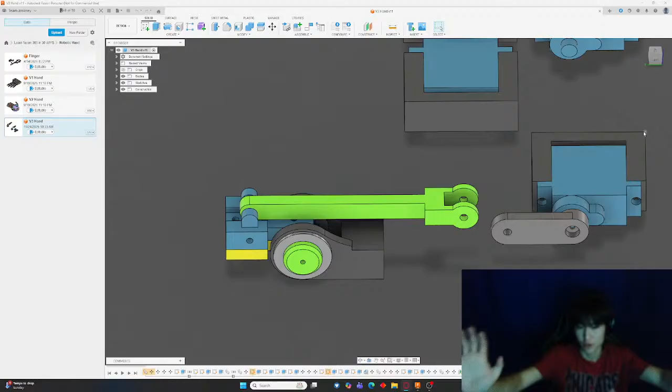So, this is session number 2 of our fusion modeling session. We're going to pick up where we left off last time with this little hinge joint right here with the servo, and I've already put this in place like that, right?

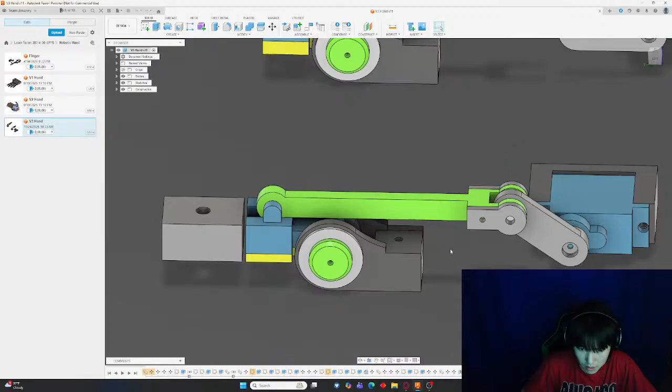What we want to do here is I've made up a quick sketch of a mechanism that I've been thinking of, just like this. So we're going to be modeling that, and hopefully all of the phalangeal joints. This is going to be quite a while, but I'm up for it. Literally, I'm up for it.

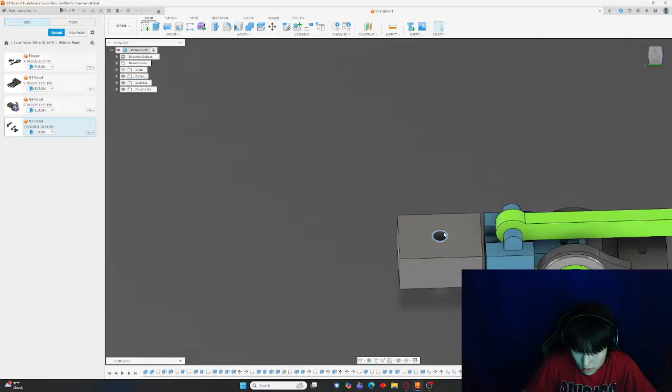So what I really want to do now is this latest edit that I did, this latest extrusion, I'm not really fond of it, so I'm going to get rid of it. Not this one, this one right here, where I extruded this, I'm going to get rid of this. I'm going to get rid of this as well. So this will be the proximal phalangeal joint.

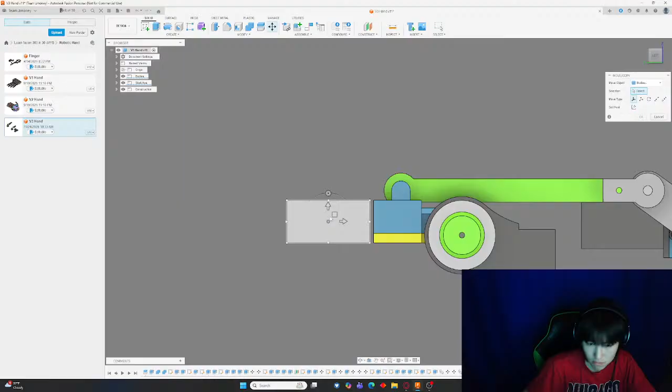This is kind of just the palm section. This is like the metacarpal, I guess. So usually you want the proximal phalange to be pretty long, and we want this to protrude a little bit upright. You want this to have a little curve, I guess. So we're kind of just going to have to freehand this, really. Just whatever works, I guess.

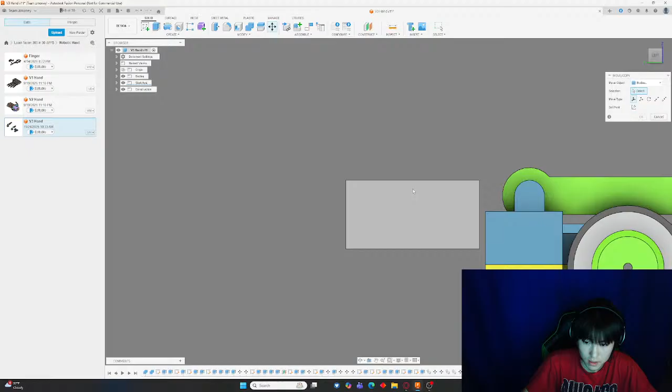Honestly, I think I'll keep it level for now. So I'm going to keep this level just for now, I guess. I should probably be moving it a little bit, so this way, right? So now that I have it this way,

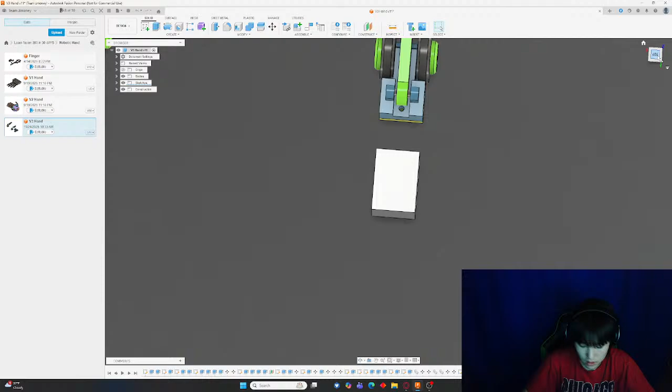I want to, let's see, let's take the diameter of this tubing here, 4 millimeters. So a 4 millimeter little thing.

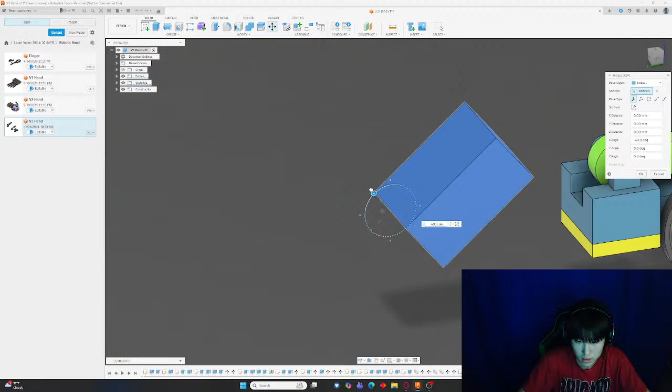So what I'll actually do is I'll construct the line like this, and then I want to move this, actually. That's not what I want to do. I should be doing this. I'm going to do this. I'm going to put it at a 45-degree angle, and I'm going to construct one right here. And now I'm going to move this back.

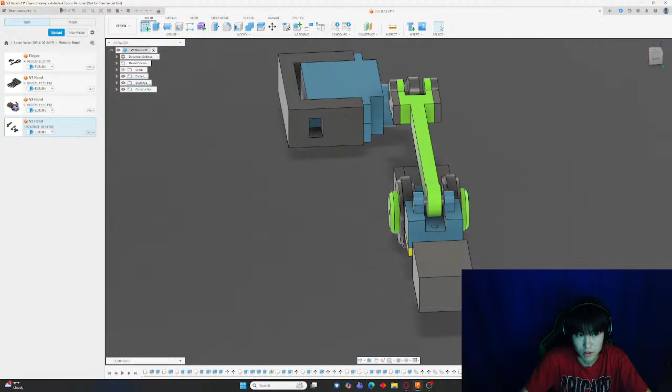Crap, I just realized that I can't really do that. So I'm actually not going to do that. What I want to do is create a body. Yes, that's what I'll do. I'll create a body like this, right?

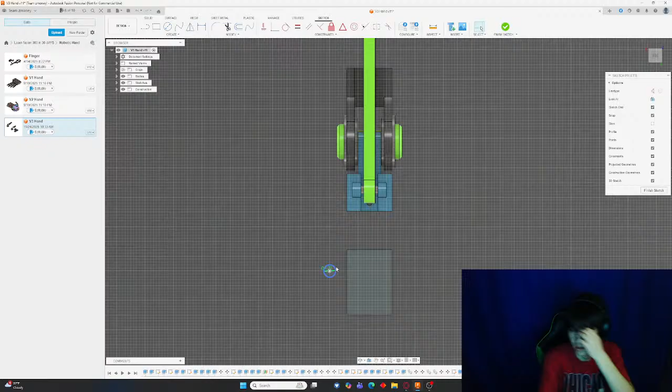0.42 - it's just got to be 4.2. 4.2 millimeters, because you want to think about the printer tolerance as well, right? I don't really know if 4.2 is going to make much of a difference, but usually when I make these kinds of models, I just do it all the way, but maybe it's different. So I'll just try it as an experiment.

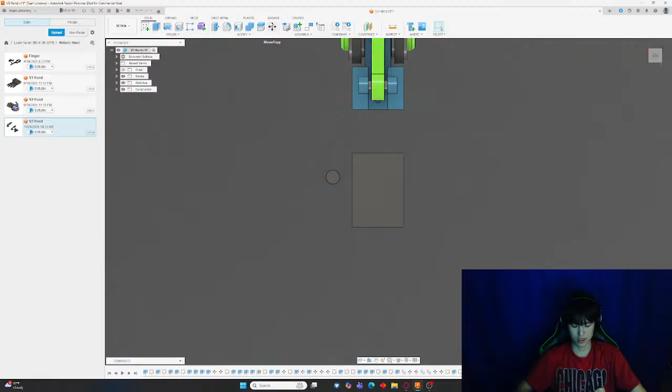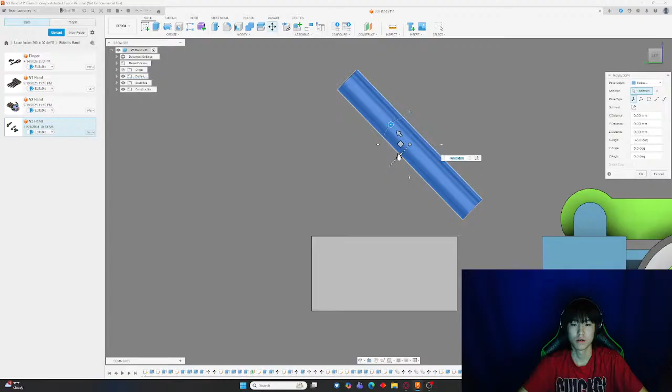So now I have this 4 millimeter tube, and since I have a 4 millimeter tube, what I'll do is I'll just put it like this. Make sure it's in the middle. It seems to be in the middle. And I'll go at it from here. I'm going to rotate it 45 degrees. And then I'll just move it like this. Bam, that seems pretty good.

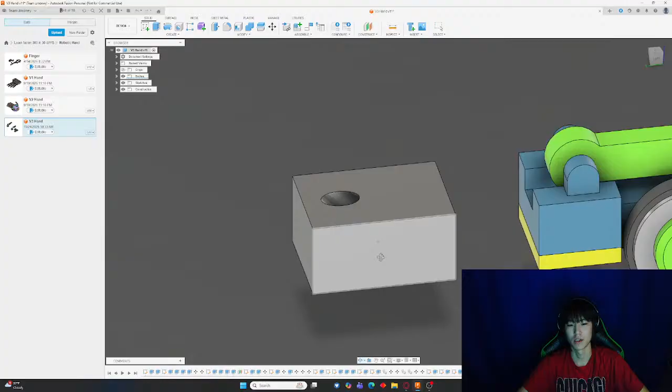And then I'm going to do - I'll do this. I'll just go through like that. Now we have a 45-degree angle hole in our CAD. So that's pretty good.

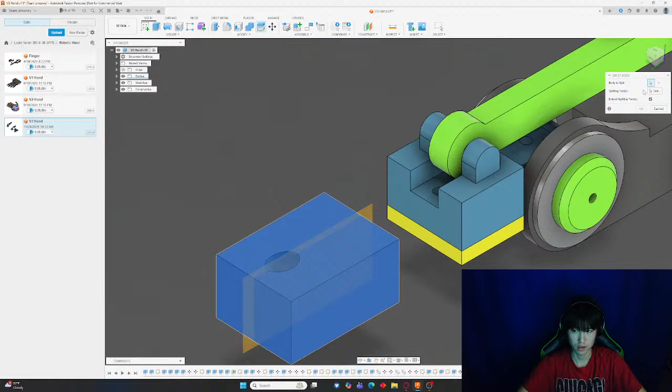Now how about we try splitting this in half? Let's do a construction plane, 8 millimeters, and we're going to split this body. So when we split it, we can see that it's good. And now we want to have a thing at the front. That's in the middle, so it's good.

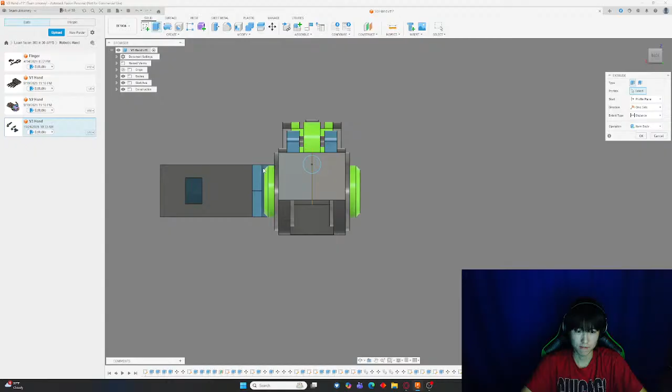How about a 4.2 right here? Let's do that. And then we want to just cut it into there. Let's just try to smooth this. Let's do it halfway, see if that's good. Oh my god.

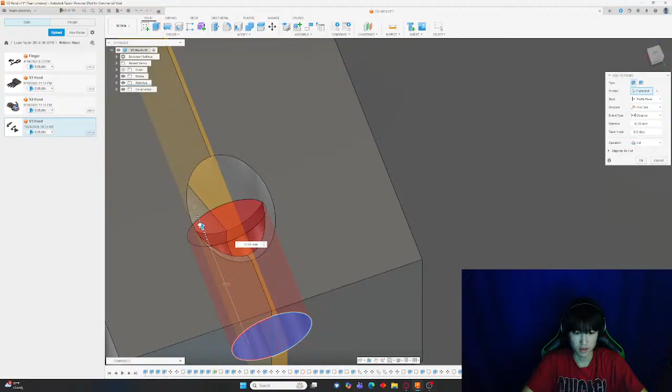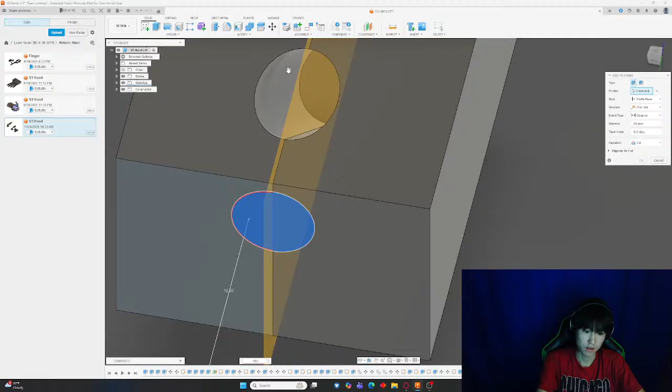Okay, maybe that was not good. Maybe just on the spot is good. That's kind of rough, I don't know if I like that. Let's try to get it up to, let's just do 10, right? -10. -10 cuts it all the way into it. Let's do 9. -9 and it makes this weird divot. I don't like that.

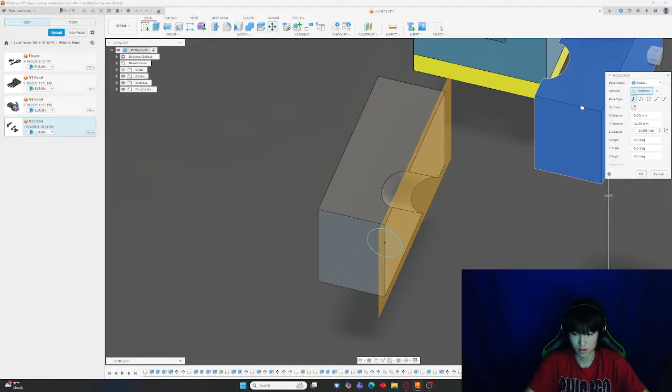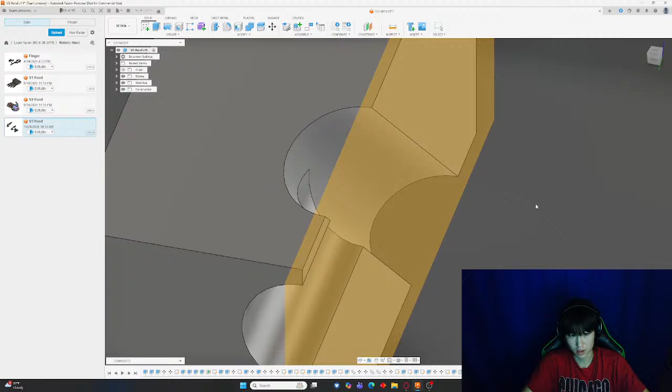So let's try moving this and then we'll try it. And so we can actually see a good side view. I see, so the magic spot really seems to be 8.6. And that makes it a nice spot like that without any weird divots or anything like that. So 8.6 is the magic number.

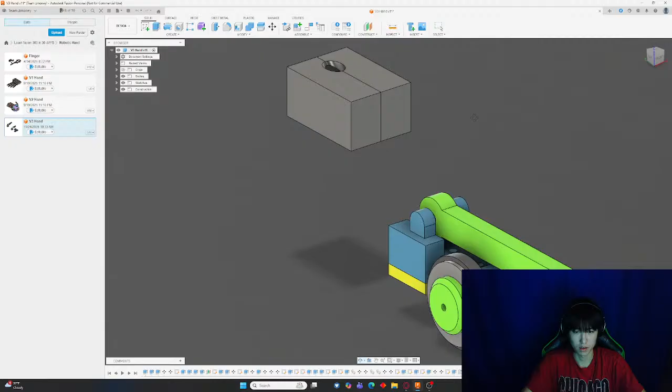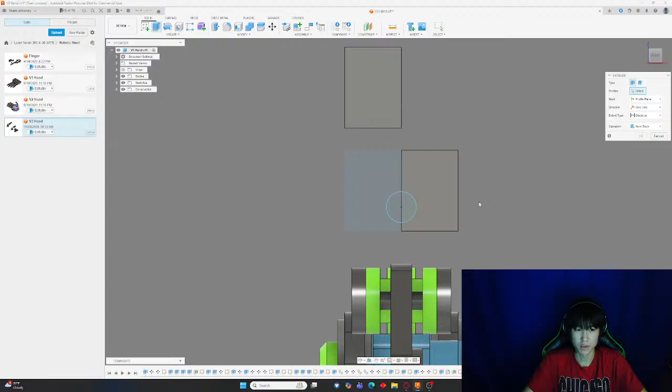-8.6, there you go. And let's just try one on the other side. So we're going to have to move this up actually. I'm going to just hide this face. There you go. Okay, so we want it to be like here. Nope, talk about 1 cube higher. There you go. And then we're just going to move this to see what's here.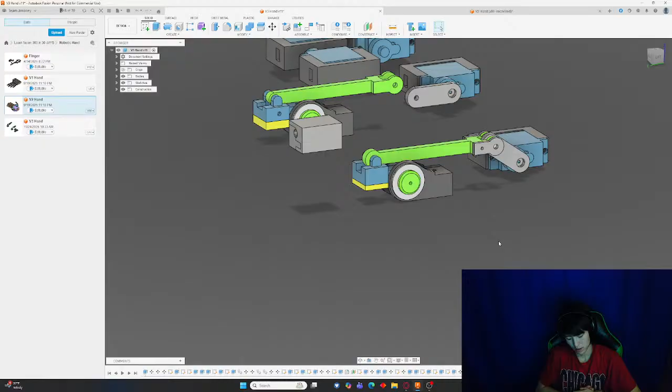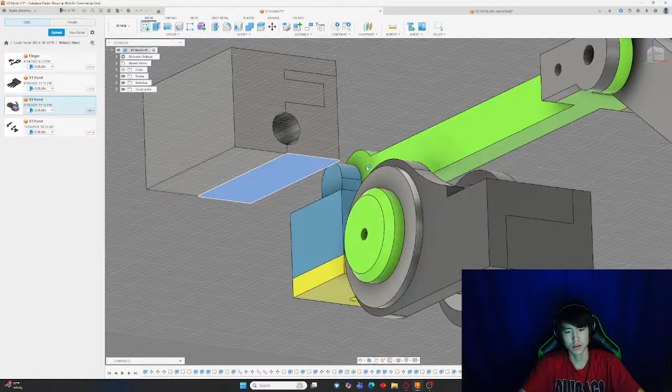It would really have to just be the two would have to come out and just be like a flexible piece, in which it would have to rest against one of these. I don't really know if I like the concept of that. That just seems kind of, I don't know how to explain it. It just seems kind of weird, because it doesn't really make much sense as to why it would do that, right? So I don't know. That is strange. Very strange.

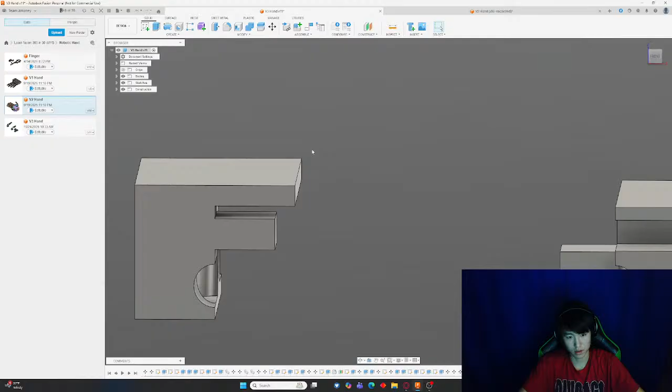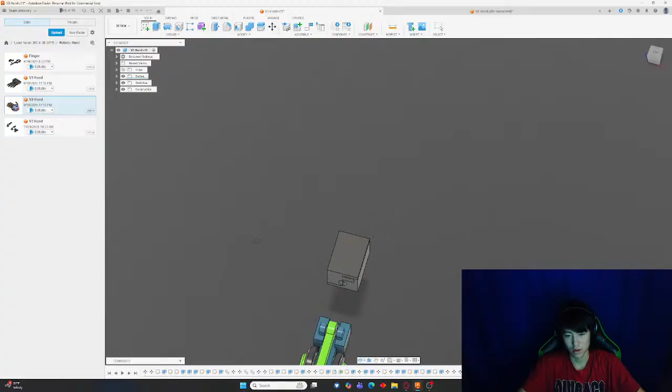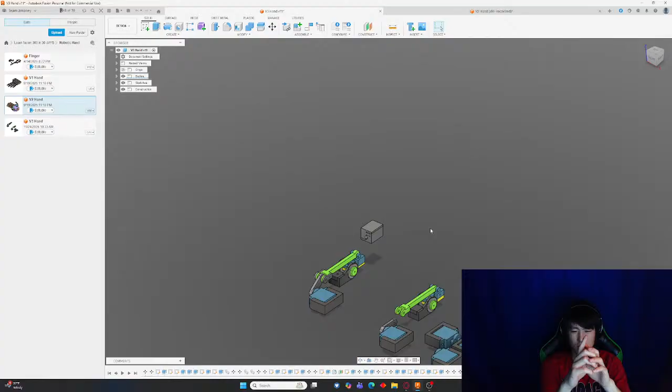So how would I want it to be out the back? Which I'm not exactly sure how I'm gonna achieve that. I think it'll be fine if I just use something akin to the old mechanism, but that one had a lot of friction, and I'm not sure I like the concept of having so much friction.

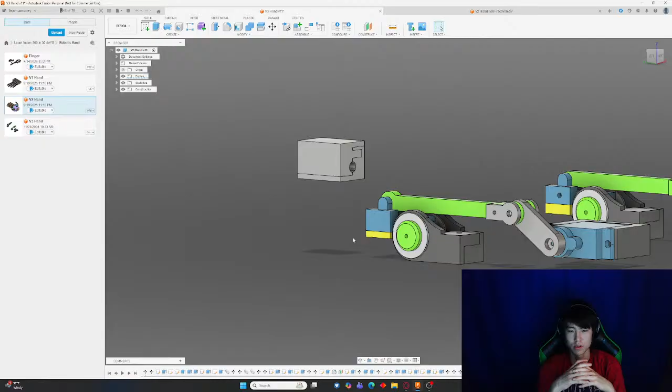Another thing I could think of is we could use just springs as a way for these to pass through, right? It could honestly work, because extension springs, when they're inwards, it's pretty easy for it to bend and act as a nice passageway for the string to go through. So I could honestly see that working.

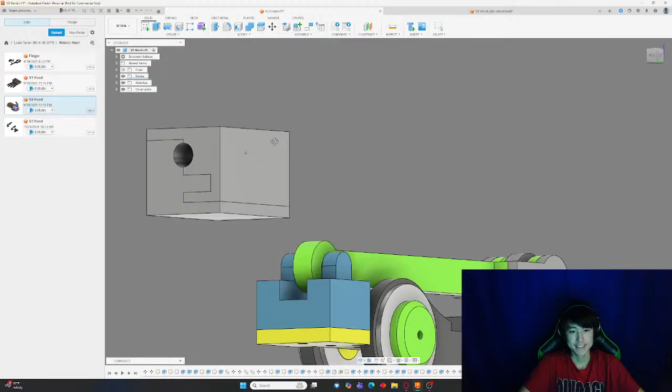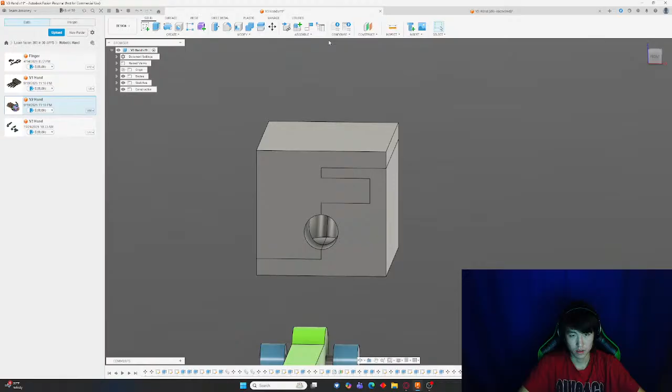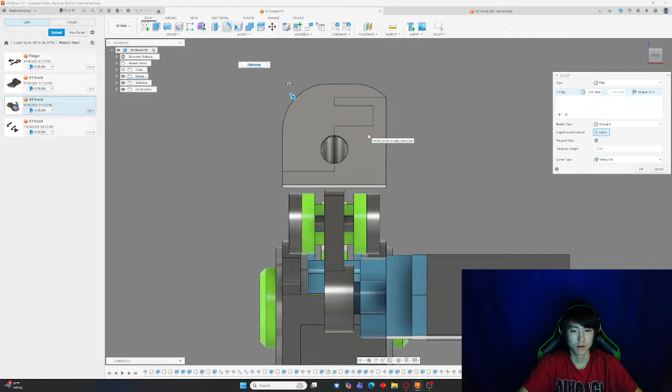Now this thing's like giant. I don't know how or why it's like that. Jesus Christ. I'm gonna kind of smooth this out, because good Lord. Okay, so the maximum smoothness this part can have is 2. This can have a smoothness of 7. What is the smoothness of 7 here? I see. It's not symmetrical just because of this piece.

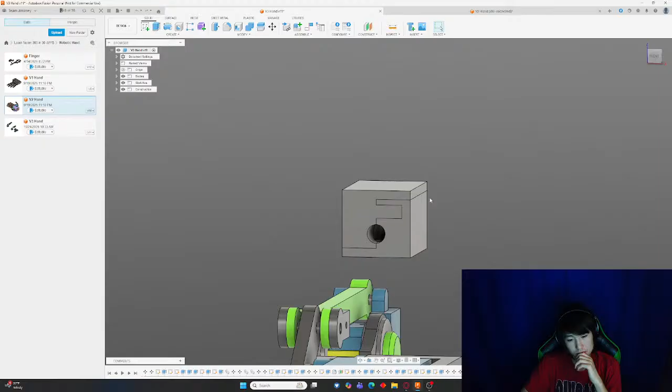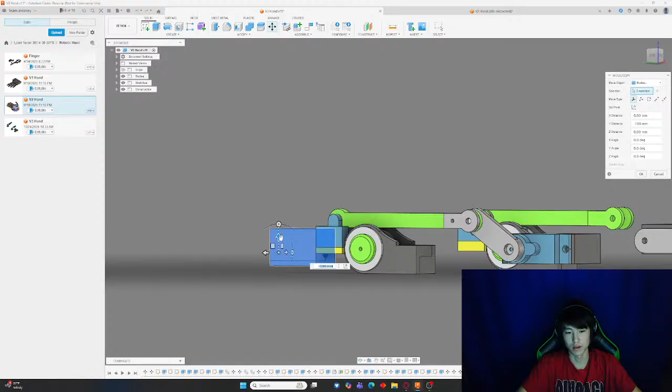I don't really know if this was a good design element. Yeah, I don't know about that. I think it'd be good if I just make it a solid piece, right? For what it is, for now, it doesn't have to have that. So I think I'll just keep it like this, just for now. Since this is only a prototype, it doesn't really matter if it's fat or what. That's fine. Okay, I'm just gonna have it like that. We'll figure it out later, I guess.

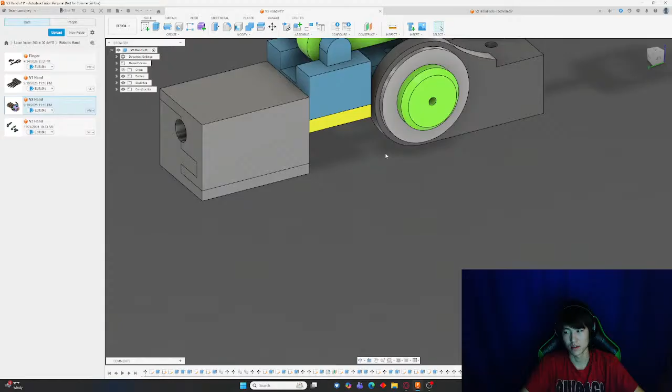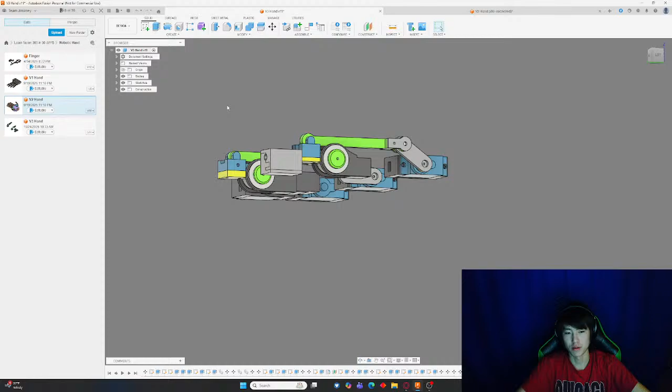I'll just put like 2 plates right here. Or I'll just solder it in place or something. Just for now, I guess. And then we just want to make sure the 2 passes through fully. And it goes out right there. Yep. It's pretty good. And then this thing's about the size of a servo, so it's not terribly large. However, when you compare it to a real human hand, it's pretty large.

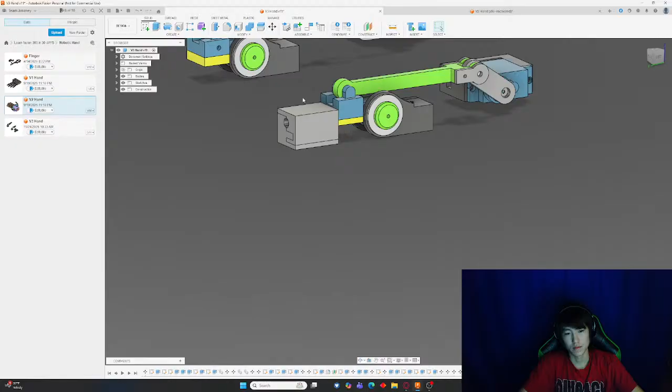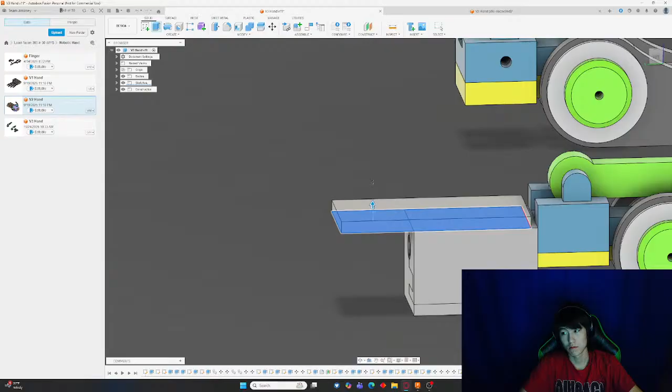So if we think about the bending motion of this, this would be like that, which is actually not horrible. So I'll add some stuff here. I'll add like a weird bracket piece thing that's super long. So this actually acts as the first metacarpal. Not the metacarpal, the first phalange. So, yep. Why is this here? I don't know. You tell me, why is it here?

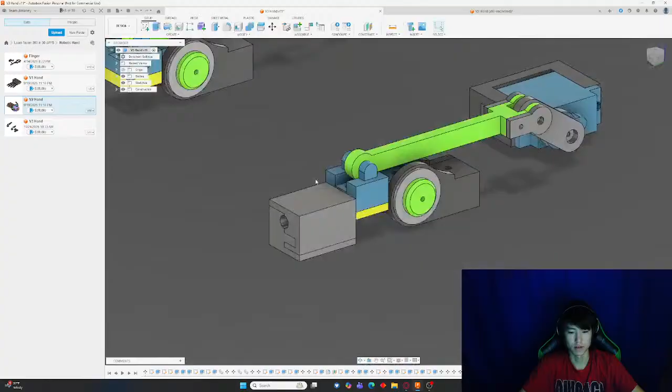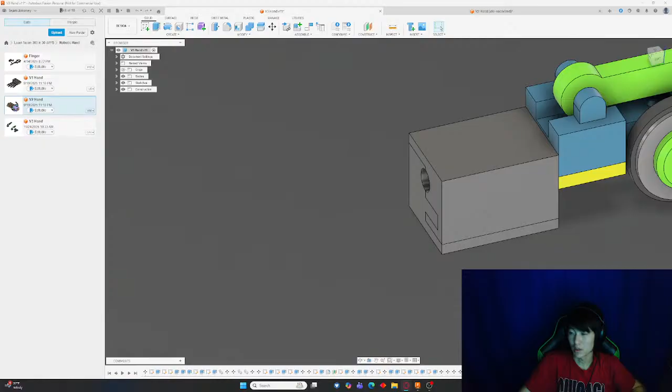So now, this is just the prototype phalange, right? But actually, I don't want that. I don't know why I made that. What I actually want is some good small ball bearings, something that the Robot Studio uses. I really like the way the Robot Studio uses his ball bearings. He is, I think, one of my biggest inspirations in the way that he uses his components. So, a finger overview.